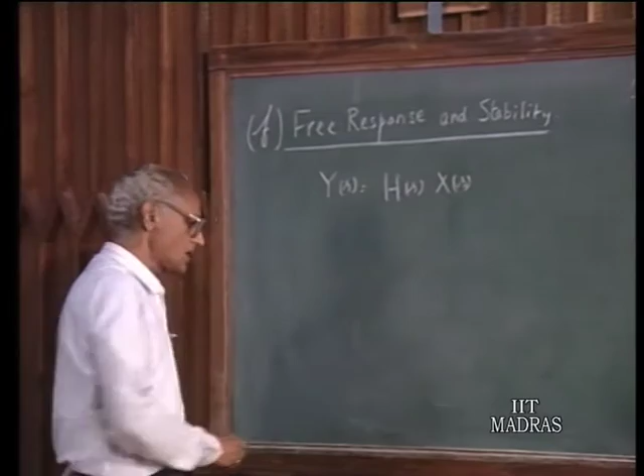We considered various aspects of the characteristics of H(s). Now let us start by considering once again the free response of the system as given by the poles of H(s). We said in the last lecture that as far as the output is concerned, it consists of two parts: one which corresponds to the poles of X(s), and one which consists of the poles of H(s).

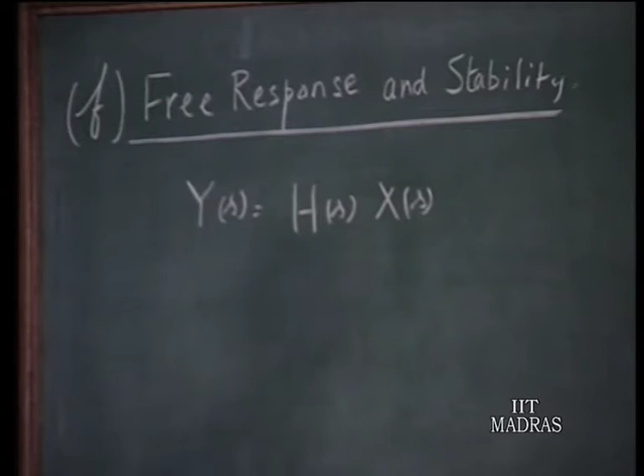The poles of X(s) give rise to the forced response part of the output, and the poles of H(s) will give the part corresponding to the free response of the system, or the natural response of the system. The poles of H(s) are indeed the zeros of the denominator polynomial in H(s). Now, depending on the location of the poles of H(s), we have different types of behavior.

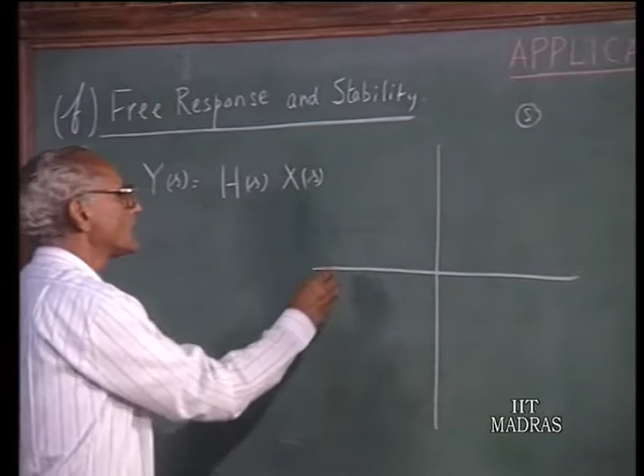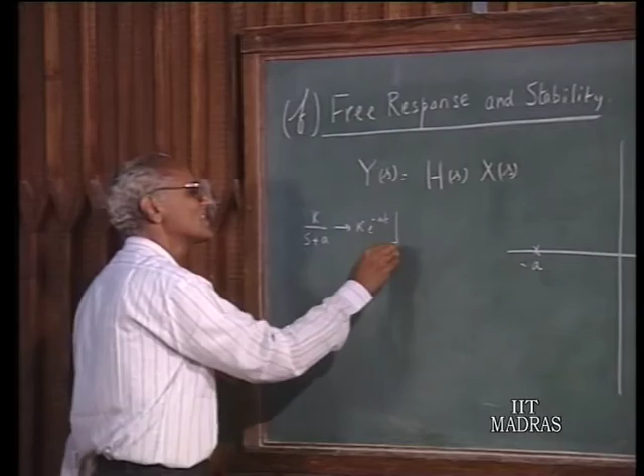So in the complex S plane, suppose I have a pole here at location A. That corresponds to, in the partial fraction expansion, k over s plus A, and this will give rise to a response k e to the power of minus at. So that is something which decays with time.

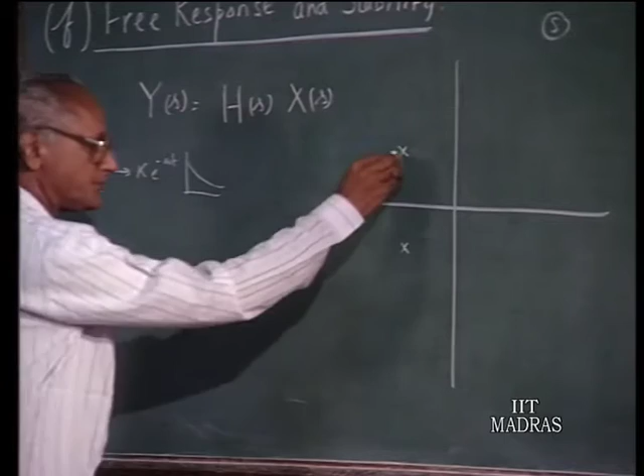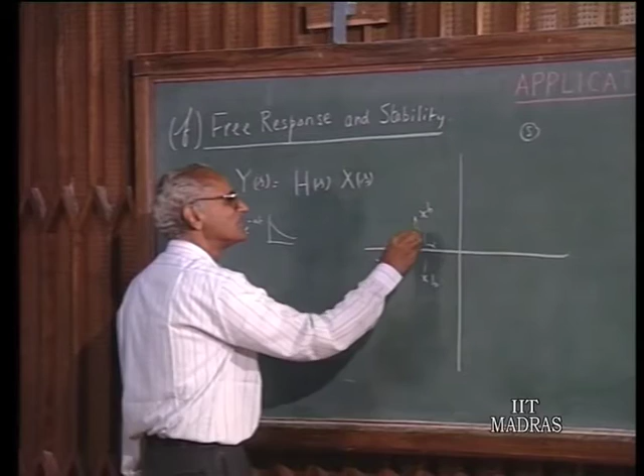On the other hand, if I have a pair of complex conjugate poles here, at locations B, this will be of the form Ks plus m divided by s plus alpha whole squared plus omega naught squared. That is the type of partial fraction expansion you get corresponding to the locations at B, where this is minus alpha and this is omega naught. That gives rise to a response which is something like a e to the power of minus alpha t, sine omega t plus beta, which means you are having decaying oscillations with the amplitude decaying exponentially.

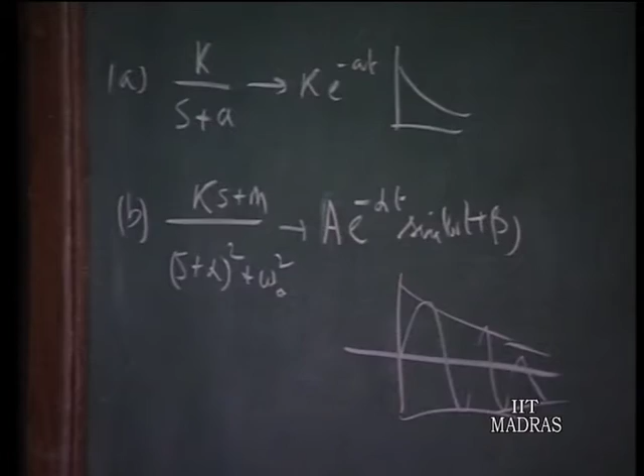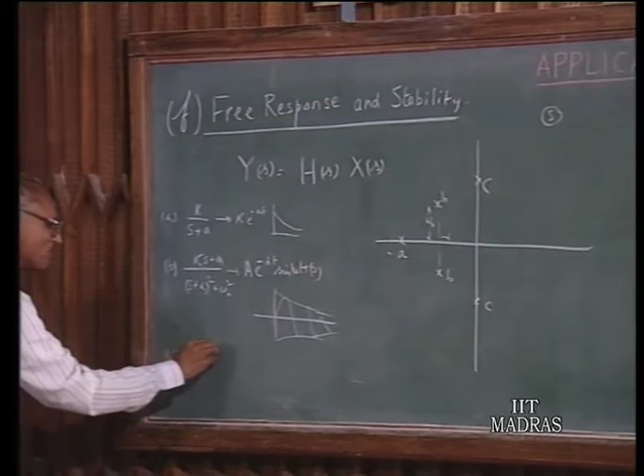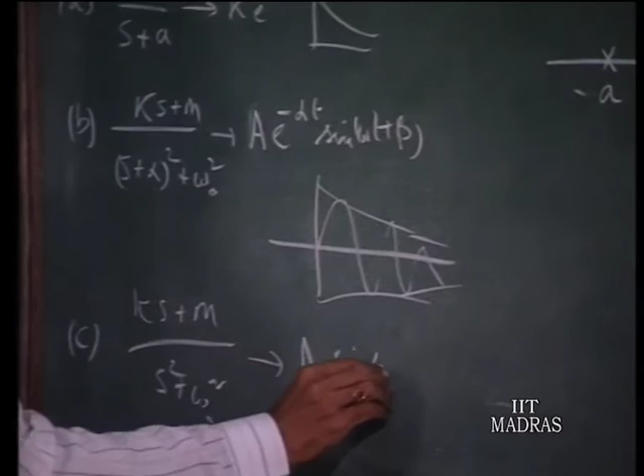On the other hand, if you have a pair of poles on the imaginary axis, at location C, that corresponds to something like Ks plus m over s squared plus omega naught squared, and this gives rise to a response which is sine omega naught t plus beta, which is sustained oscillations. Therefore, the poles of H(s) dictate the natural response of the system.

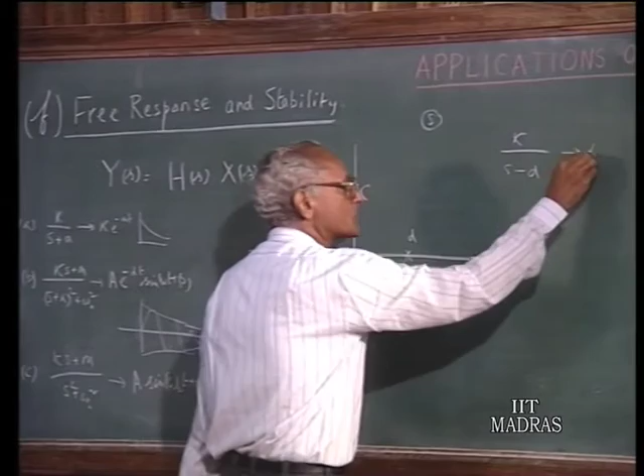On the other hand, if there is a pole in the right half plane, suppose there is a pole here at location D, that corresponds to s minus D, and this corresponds to k e to the power of dt, representing an increasing exponential which indicates instability.

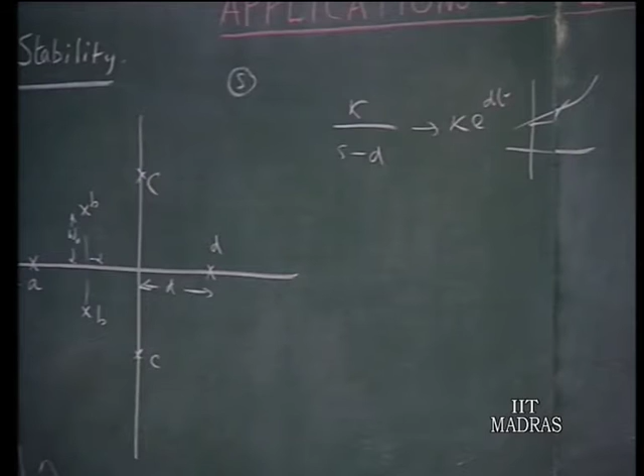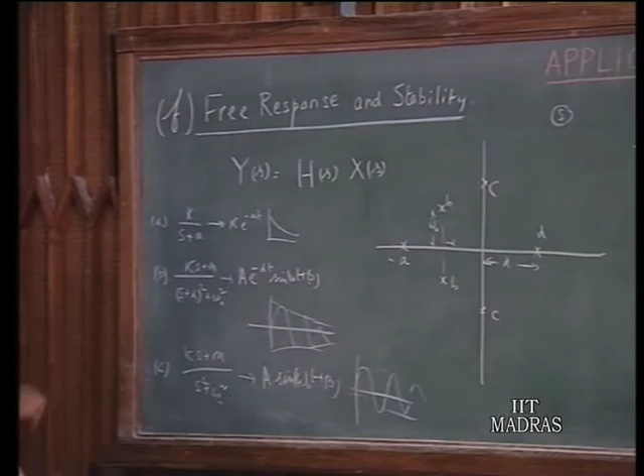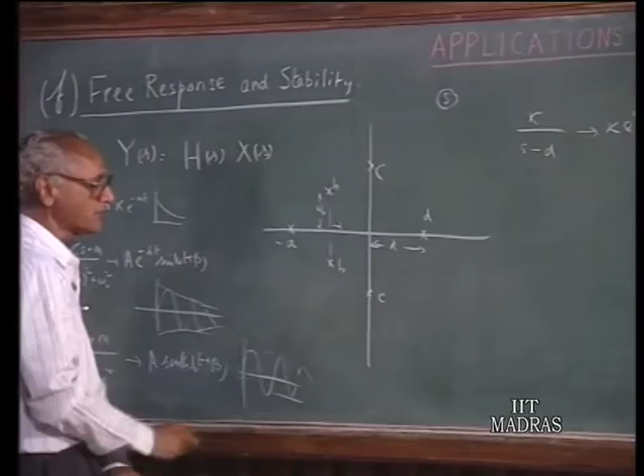So one can say that if the system is stable, a bounded input giving rise to an X(s) which is finite means the natural response must decay with time, or at least stay steady with time. It should not take off, it cannot go indefinitely to large quantities. Therefore, for a stable system we require all the poles of H(s) to be in the left half plane, and as a borderline they can be on the imaginary axis, because that is the limiting behavior.

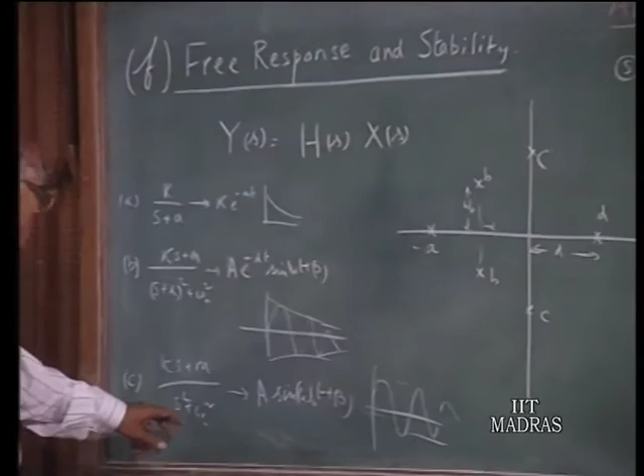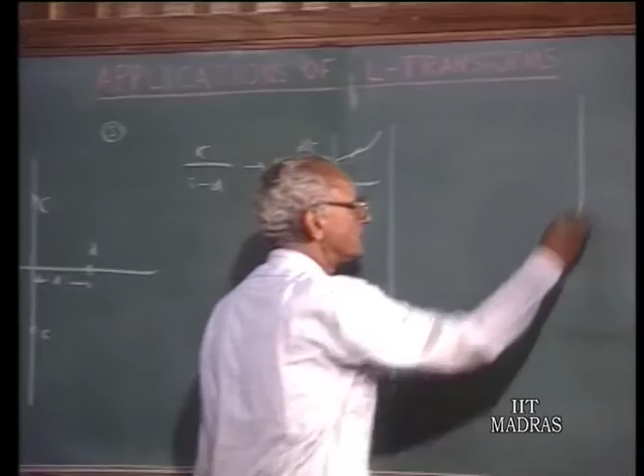However, what happens if the poles are repeated? Repeated poles really mean that in the denominator polynomial of H(s), you have factors like s plus alpha whole squared, or s squared plus omega naught squared whole squared, or s plus alpha squared plus omega naught squared whole squared, if the repetition is of order 2. So let us consider what happens if in the complex plane you have a pole of order 2, that means multiplicity 2, a repeated pole. It can be repeated 2 times, 3 times and so on, but let us illustrate it for the case of 2.

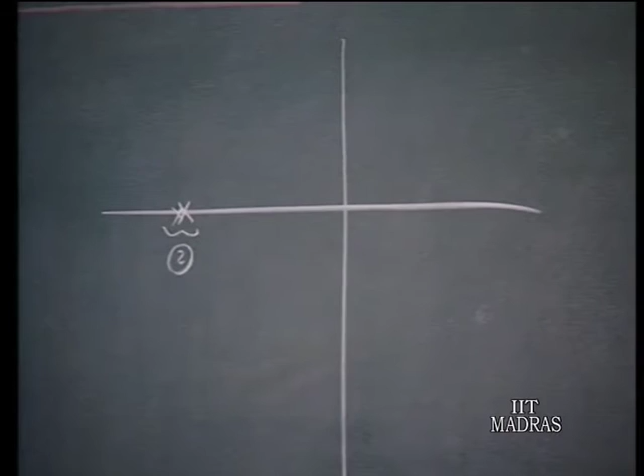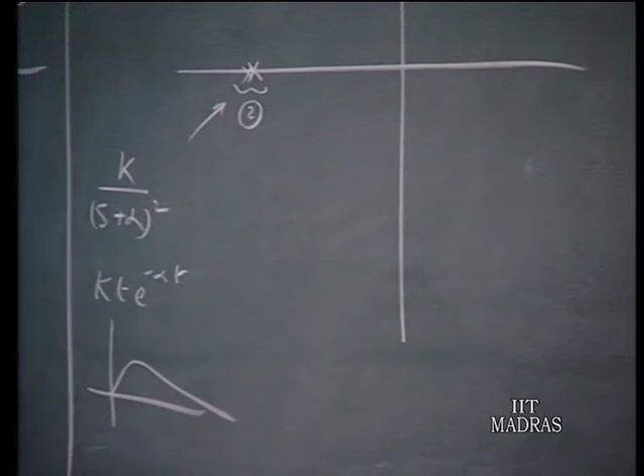That means in the partial fraction expansion you have k over s plus alpha whole squared, and the time domain response corresponding to this will be of the form kt e to the power of minus alpha t. So that means it exponentially decays but starts with 0 amplitude. On the other hand, if you have 2 complex conjugate poles repeated like this, that will be of the form some f(s) over s plus alpha whole squared plus omega naught squared whole squared.

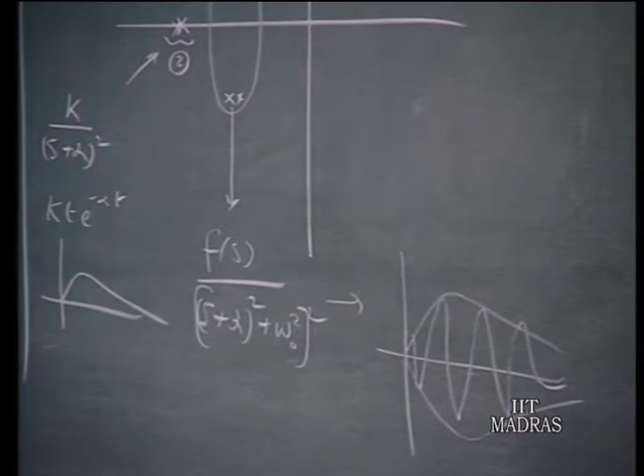That means these complex conjugate poles are repeated twice, and this gives rise to a response which will once again have this envelope. So even though the poles are repeated, since they are in the left half plane, it gives rise to a stable response. The response ultimately decays.

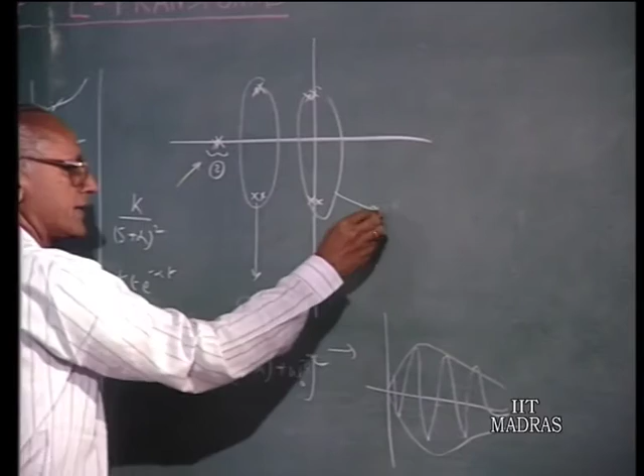What happens if there are repeated poles on the imaginary axis? Suppose they are of order 2. This corresponds to a term like f of s over s squared plus omega naught squared, whole squared, and this gives rise to a time response which is some kt sine omega t plus theta.

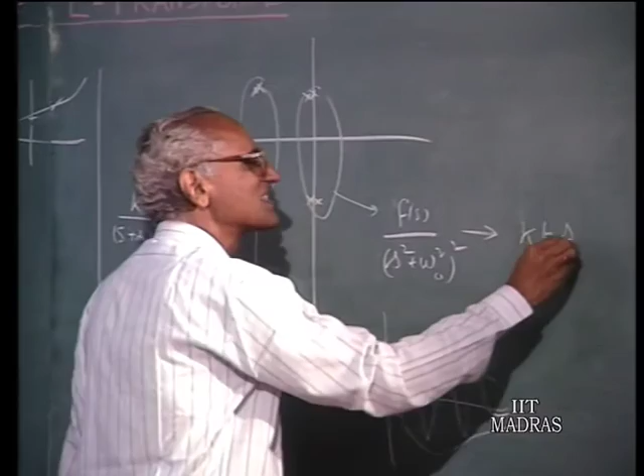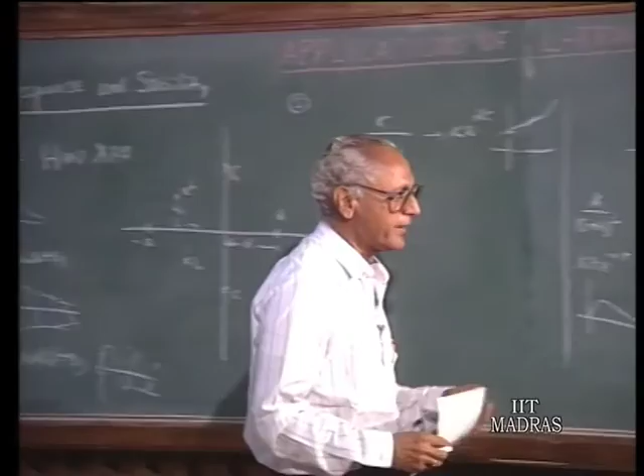That means the time response corresponding to that would be something like this. This certainly should be excluded if we want a stable system, if we have a reasonably well behaved bounded type of input. The output cannot grow indefinitely large for a stable system.

Certainly we cannot have poles in the right half plane, whether repeated or simple, and on the imaginary axis we cannot have repeated poles. Even repetition by order 2, multiple roots of order 2, are not permitted. Certainly higher order poles cannot be permitted.

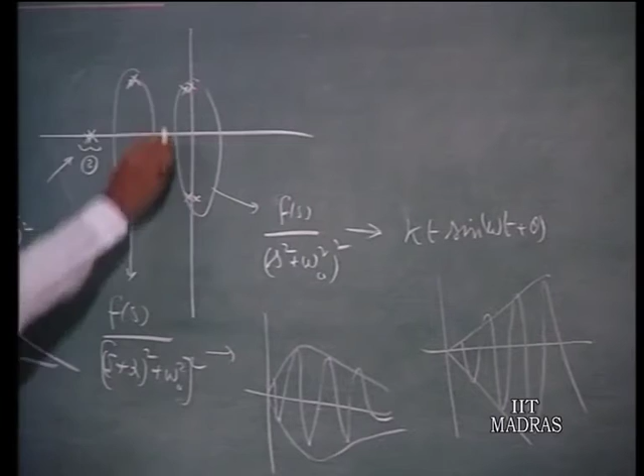But as far as the left half plane is concerned, what we have illustrated for order 2 can also be extended for higher order. That means you can have a pole on the negative real axis of order 4, 5, 6, whatever it might be, and similarly complex conjugate poles in the interior of the left half plane can be of any order whatsoever. Ultimately the response will decay.

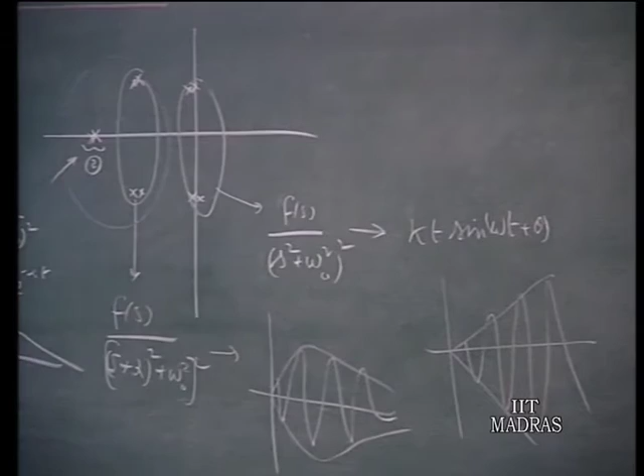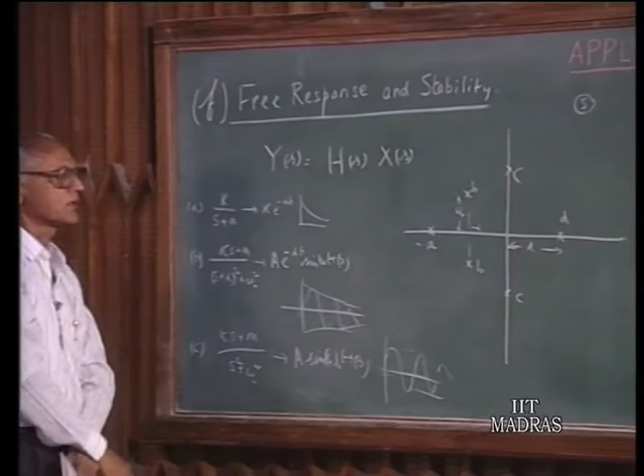On the imaginary axis, however, you can have only simple poles. To conclude this discussion, if we want the free response to decay with time, we require that the poles of h of s should be in the interior of the left half plane. If they are on the imaginary axis, they must be simple, of unit multiplicity, and they cannot be repeated.

And certainly we cannot permit poles of any order in the right half plane. So that is the meaning of stability. If the system is stable, a bounded input must give rise to a bounded response, so the response cannot take off to infinite limits. It can't grow indefinitely with reference to time, and the requirement is that the poles should be in the left half plane. If on the imaginary axis, they should be simple.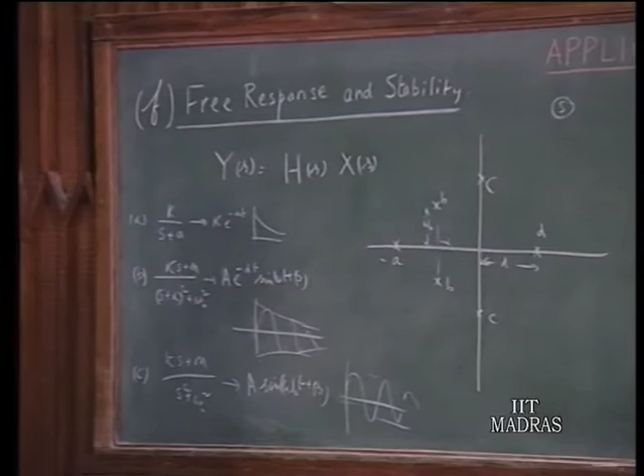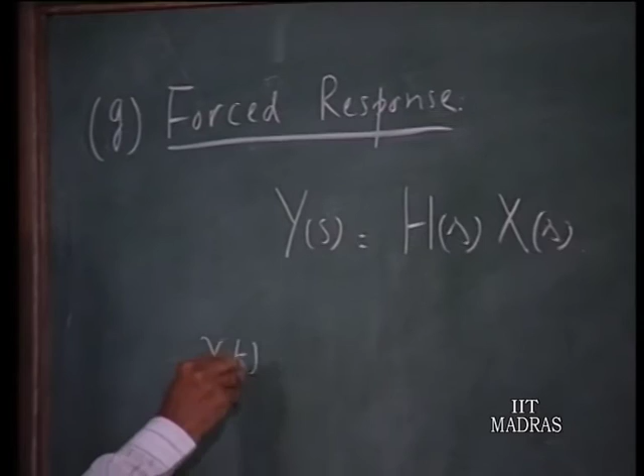Let us now look in some detail at the forced response characteristics of the system. We know that y of s equals h of s times x of s. Now we take a particular case of x of s, which is of the form x of t is a e to the power of s naught t, that is an exponential signal. Then it gives rise to a forced response y of t, which we have already seen in our preliminary lectures.

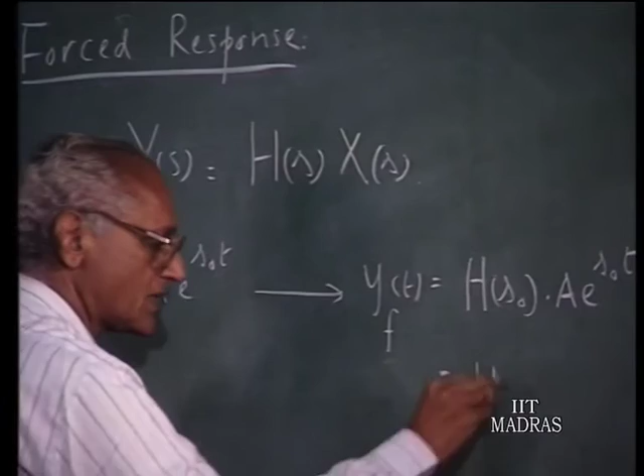Y of t will be h of s naught times a e to the power of s naught t, which means this is h of s naught times x of t. So whenever x of t is an exponential signal with complex frequency s naught, the forced response is obtained merely by multiplying x of t by h of s evaluated at that complex frequency. In h of s, you substitute s naught for s, and that is what you get. This is something which we already discussed. Let us see how it arises.

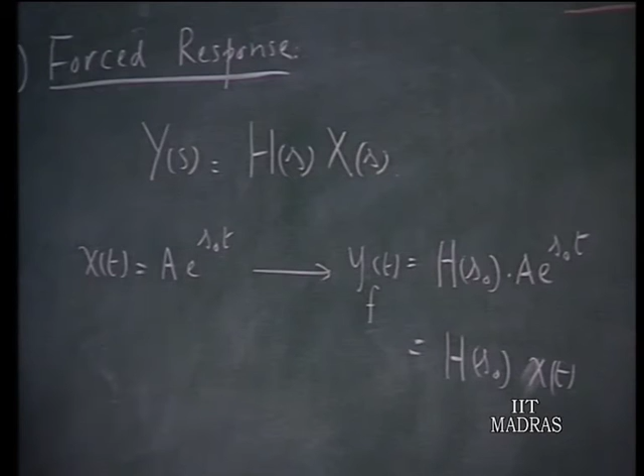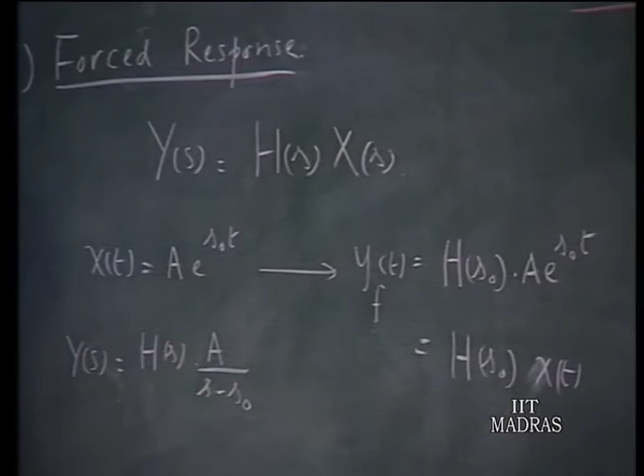We know that if x of t is a e to the power of s naught t, y of s will be h of s times the Laplace transform of x of t, which is a divided by s minus s naught. So in the partial fraction expansion of this, you have one term corresponding to s minus s naught, which is h of s naught times a, plus terms corresponding to poles of h of s.

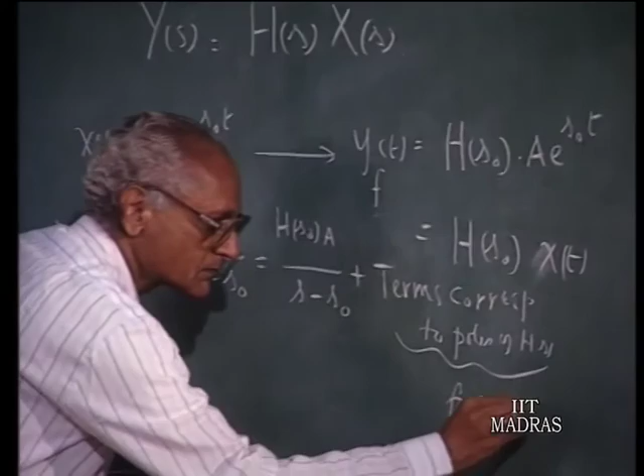They give rise to the free response. The forced response is given by this term. This gives you the forced response. And so from this, y of t, the time domain representation, is a times h of s naught times e to the power of s naught t. So that is what we are having. That's exactly what we said is the forced response.

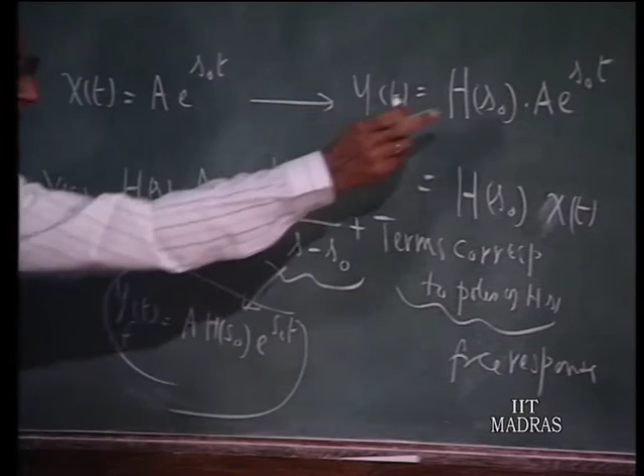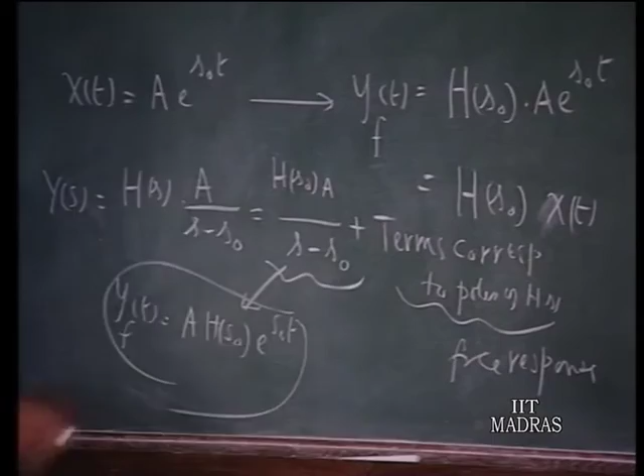So this is how it ties up with the Laplace transform theory, what we already know from your preliminary lectures: whenever an exponential signal is there, the output, the forced response, is the input times h of s naught. Now, arising out of this, we can talk about the frequency response characteristics.

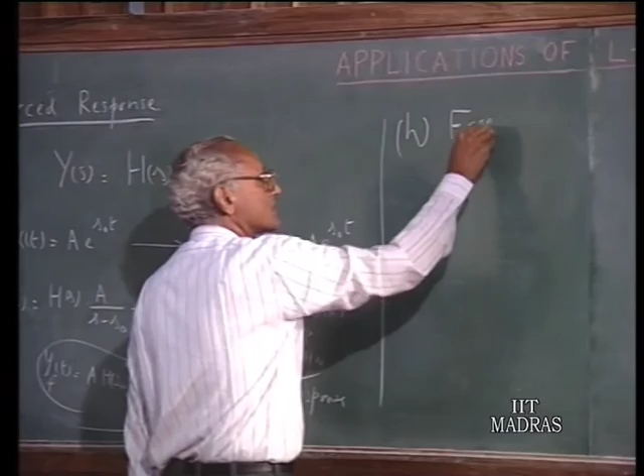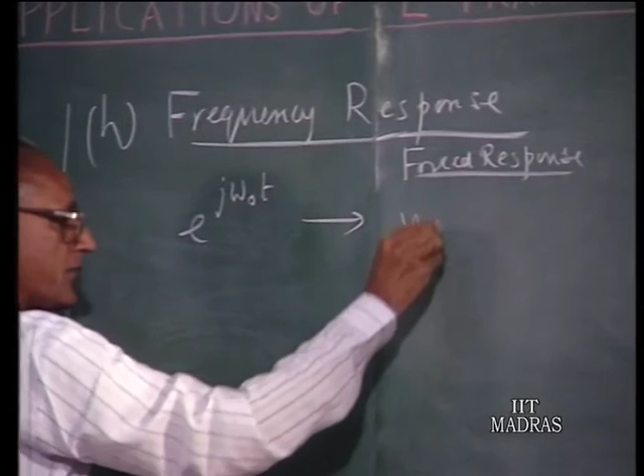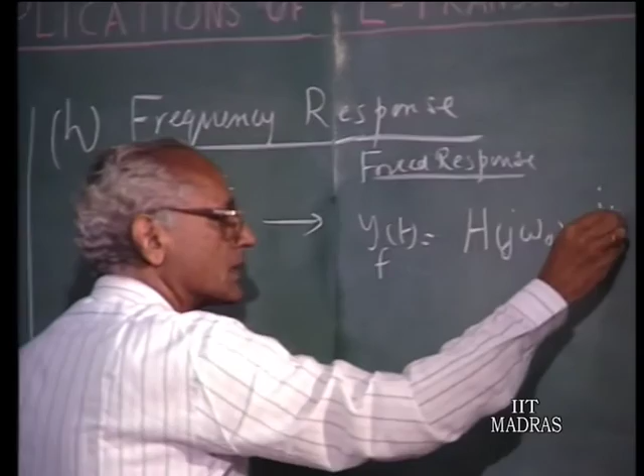Suppose you have e to the power of j omega naught t as the input quantity. Then we know the forced response of this. The forced response of the system, y sub f of t, where this is x of t, is h of j omega naught times e to the power of j omega naught t. So this is the frequency response function.

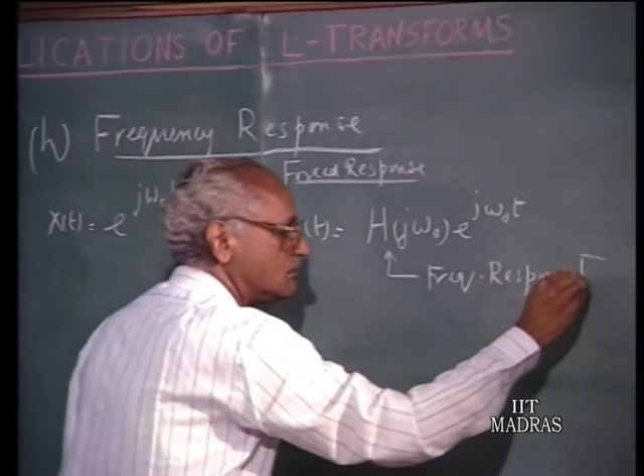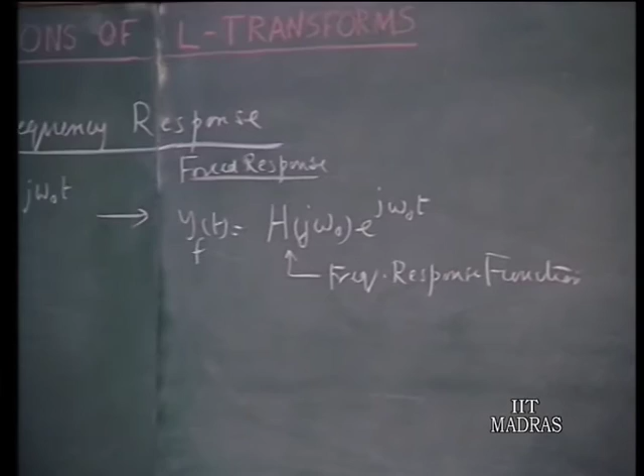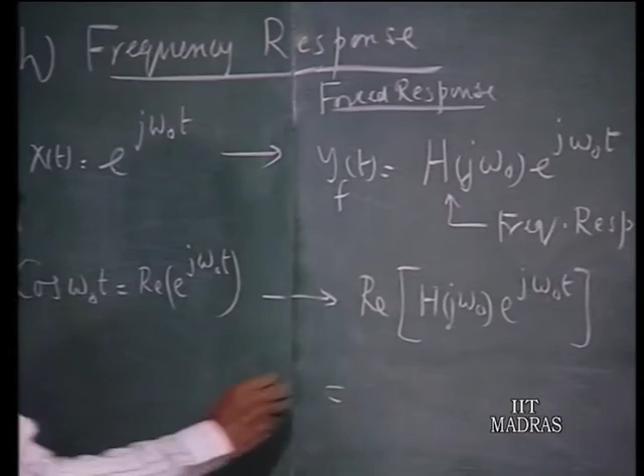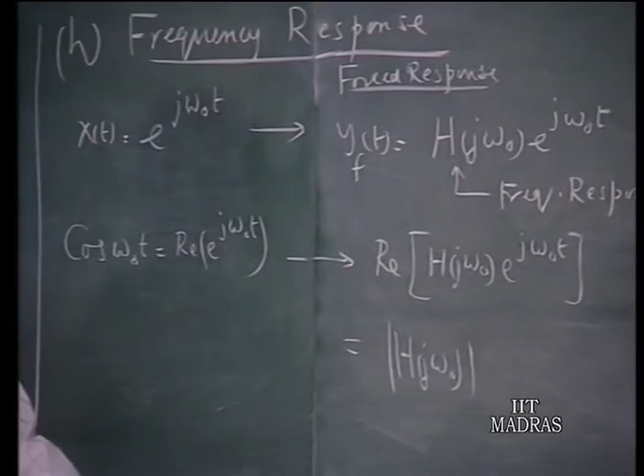We are often interested not in exponential signals of the form e to the power of j omega naught t, but something like cos omega naught t. We can take cos omega naught t as the real part of e to the power of j omega naught t, and therefore the response would be the real part of h of j omega naught times e to the power of j omega naught t. This can be written as: if h of j omega naught has magnitude h of j omega naught times some phase, then the magnitude of this is h of j omega naught cos omega naught t plus an angle which is the angle of h of j omega naught.

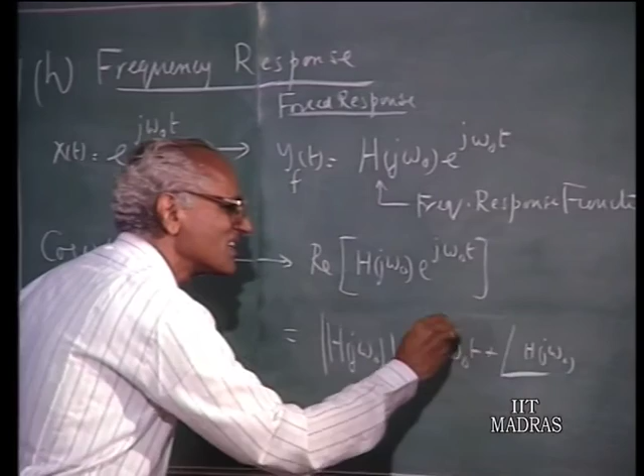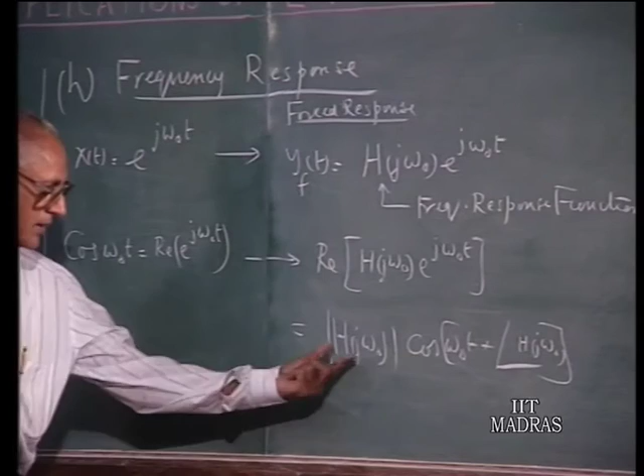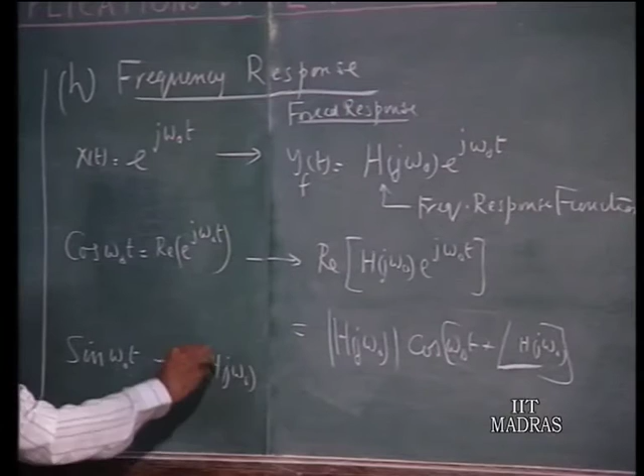So depending upon whether cos omega naught t is the input quantity, the output quantity is magnified by the magnitude of the frequency response function, and the phase is increased by the angle of the frequency response function: cos omega naught t plus angle of h of j omega naught. Similarly, if you have sin omega naught t, the forced response will be magnitude of h of j omega naught sin omega naught t plus the angle of h of j omega naught.

So this is the frequency response function. We have talked about this when we discussed the Fourier transform and Fourier series, Fourier methods, and there h of s, with substitution s equal to j omega, will give the frequency response function. So we can see how this ties up with our Laplace transformation theory.

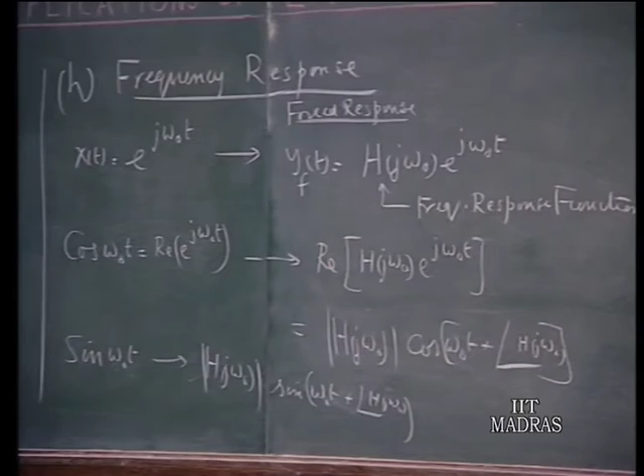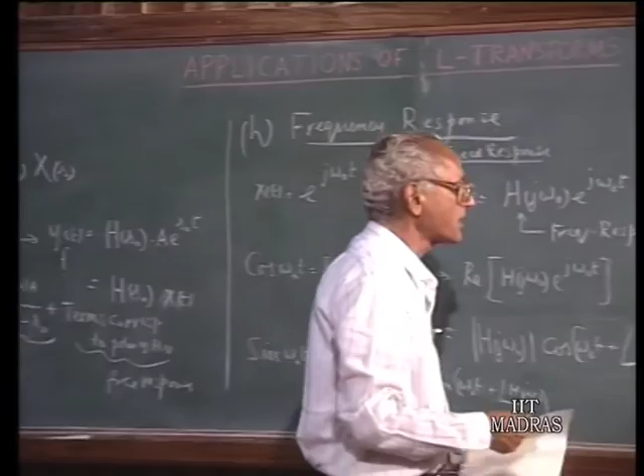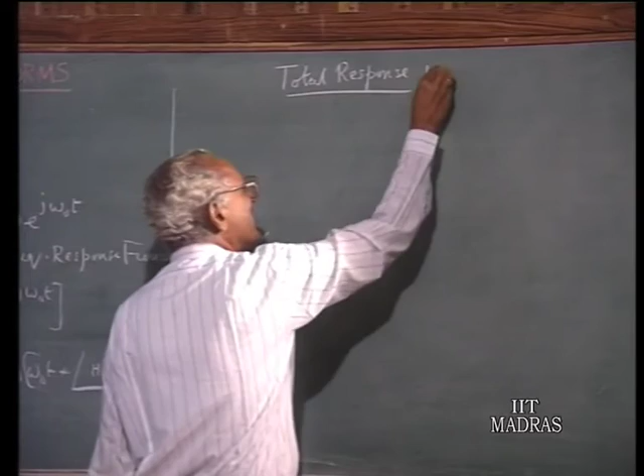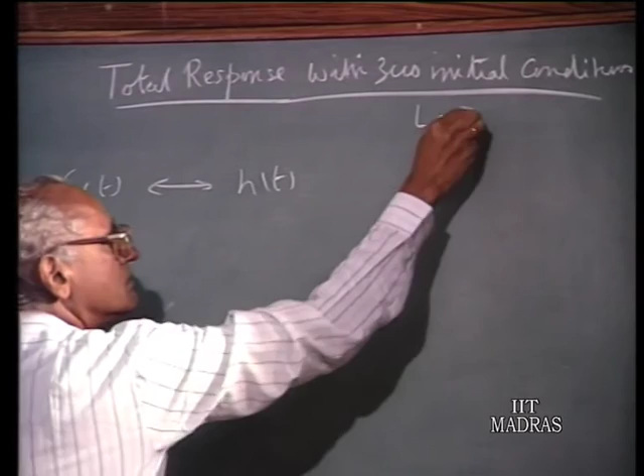To summarize then, what we have talked about is the total response with zero initial conditions. If the input is delta t, it gives rise to h of t, and the Laplace transform of that is h of s. The Laplace transform of the output is h of s.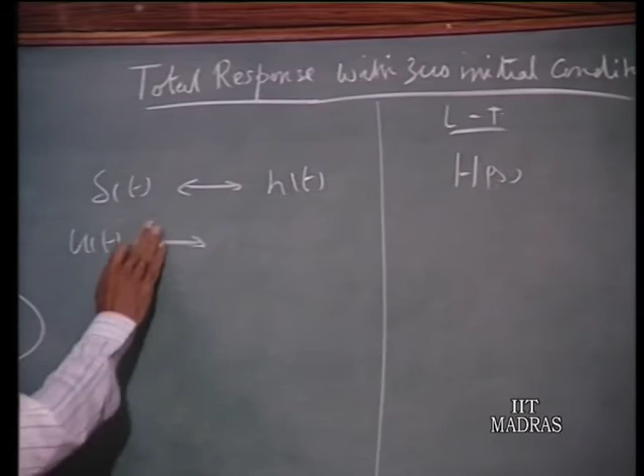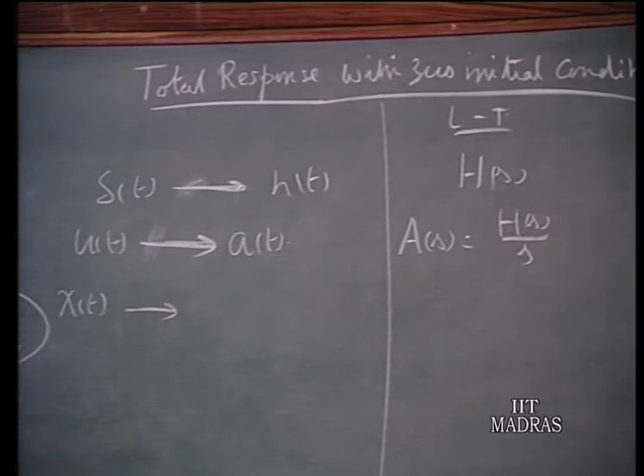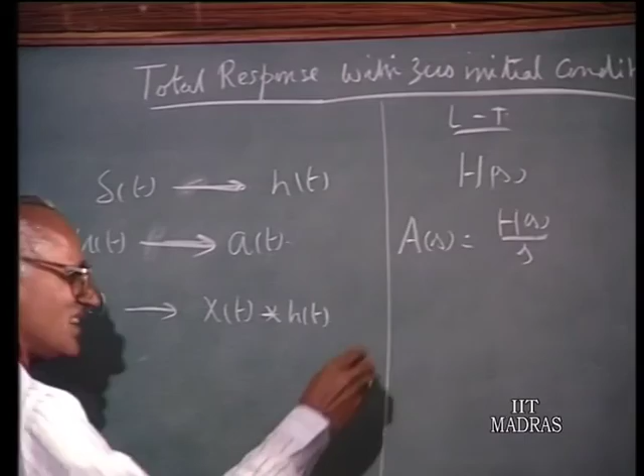If the input is u(t) -- I'm sorry, this is just the arrow, this is the input, this is the output -- we call that the indicial response or step response, and we indicated this as a(s). That will be h of s over s. So we have a general x(t). Then in terms of the impulse response we say it is x(t) convolved with h(t), which in the Laplace transform domain is x(s) times h(s).

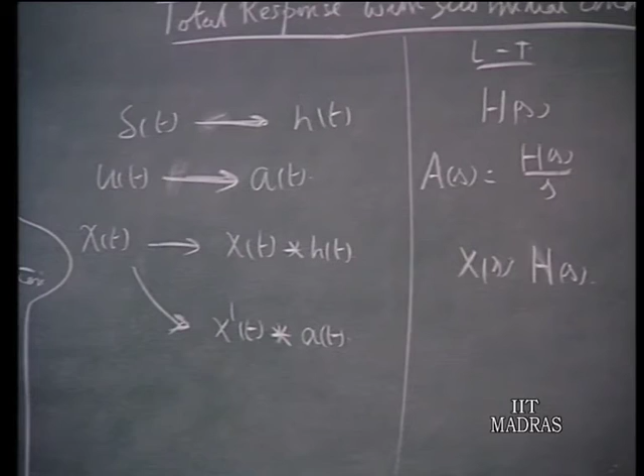We can also alternately have x dash t convolved with a(t) -- the step response. The meaning of this is x(0 minus) a(t), plus the integral from 0 to t of x dash tau, a(t minus tau) d tau. All this we discussed in the last lecture. So in terms of Laplace transforms, we can write x of s times s.

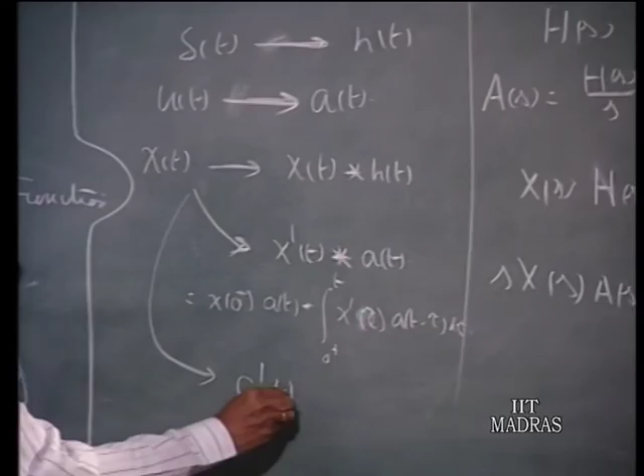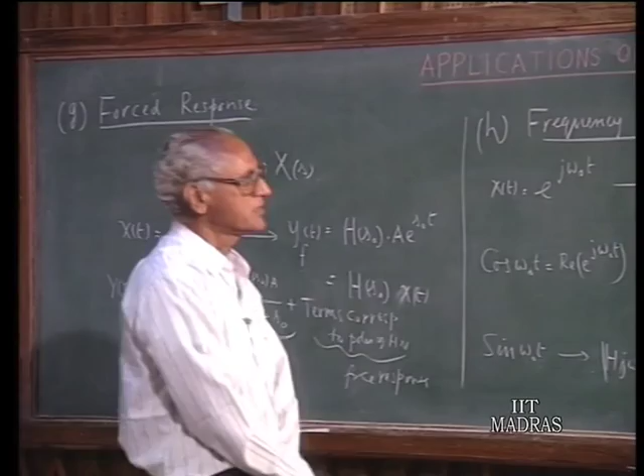We also have an alternative representation of this. You can write this as a dash t convolved with x of t, which also has the same Laplace transform. In these two expressions, a dash t and x dash t, we are talking about the situation where we take t starting from 0 minus, starting from t greater than or equal to 0 minus. So that is how the total response of a system can be obtained from either the step response or the impulse response.

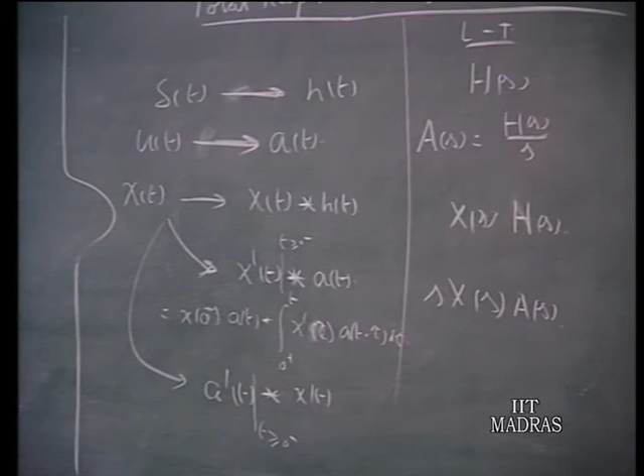Now let us set up a similar table for the forced response. If the input is an exponential signal a e to the power of s naught t, the forced response is h(s naught) times e to the power of s naught t. If it is e to the power of j omega naught t, it is h(j omega naught) e to the power of j omega naught t.

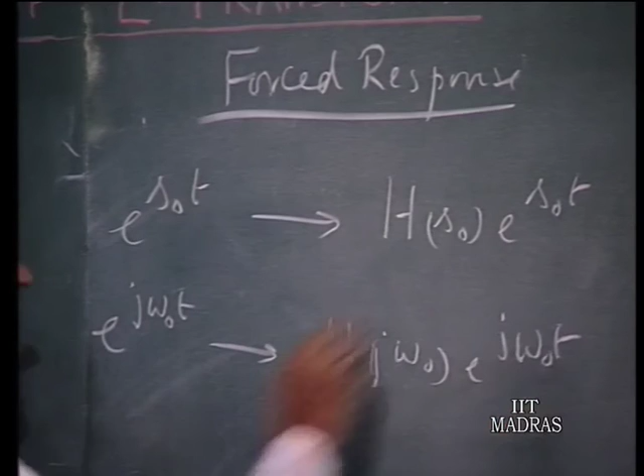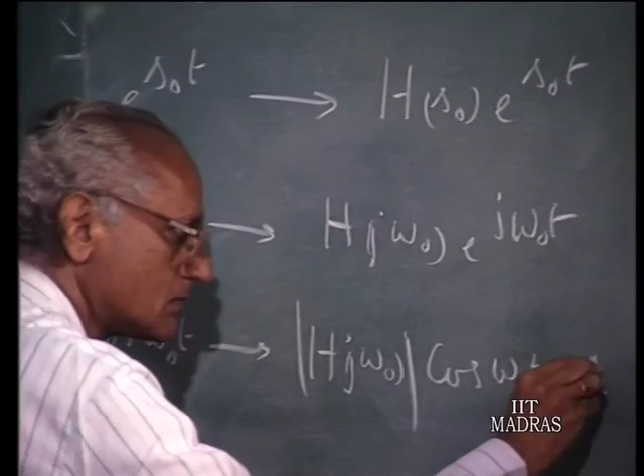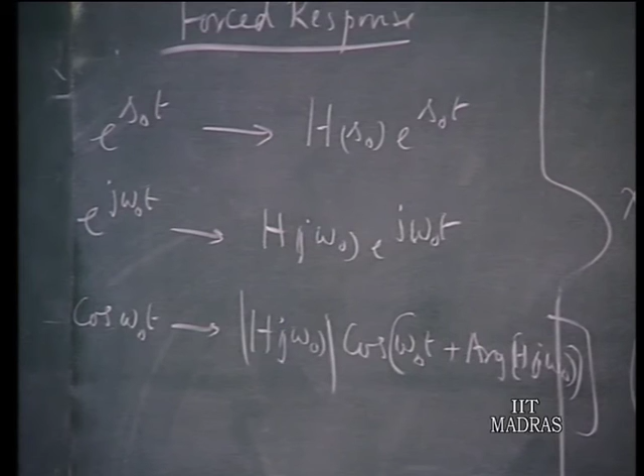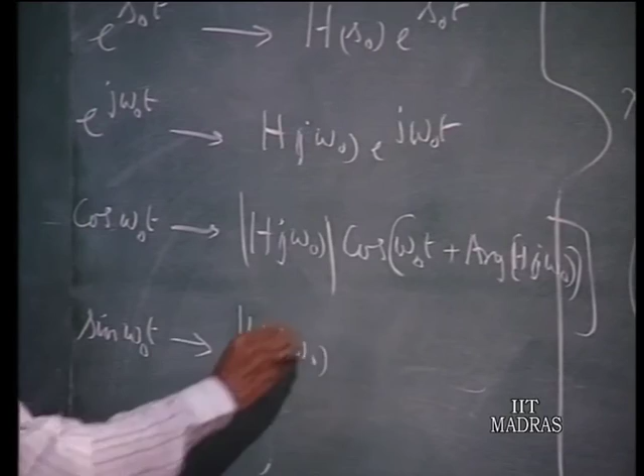And if it is cos omega naught t, it is the magnitude of h(j omega naught) times cos omega naught t plus the argument of h of j omega naught. So h of j omega naught is a complex number, and whatever angle it has is the addition to the phase of the cosine function. For sin omega naught t, this will likewise be the magnitude of h(j omega naught) times sin omega naught t plus the argument of h of j omega naught. And h of j omega is called the frequency response function.

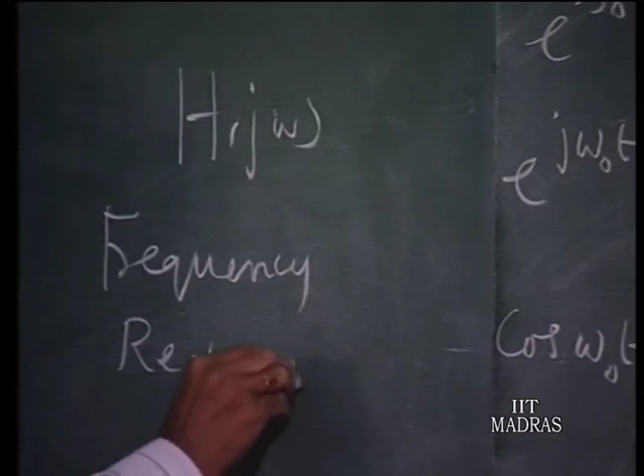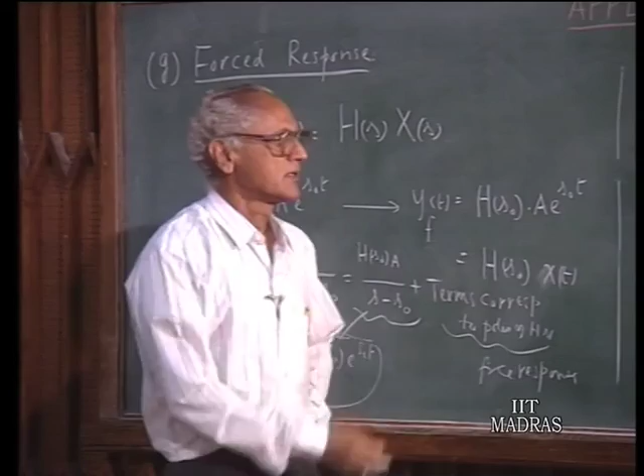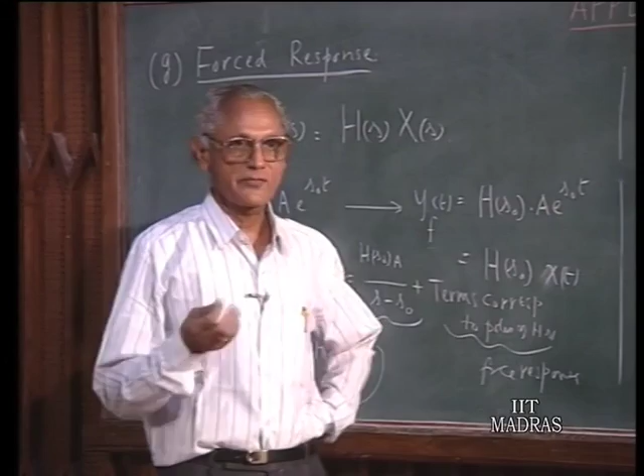Which we had used in steady state sinusoidal analysis, circuit analysis. After all, h of j omega is something like your impedance z, y, and related to h of j omega -- z is a function of omega, h of j omega is a function of omega. Impedance is the ratio of voltage to current. So if you take the voltage as the response quantity and the current as the input quantity, the system function corresponding to that is z -- normally what we talk about, z is a system function in this context. Let us now work out an example to illustrate these ideas.